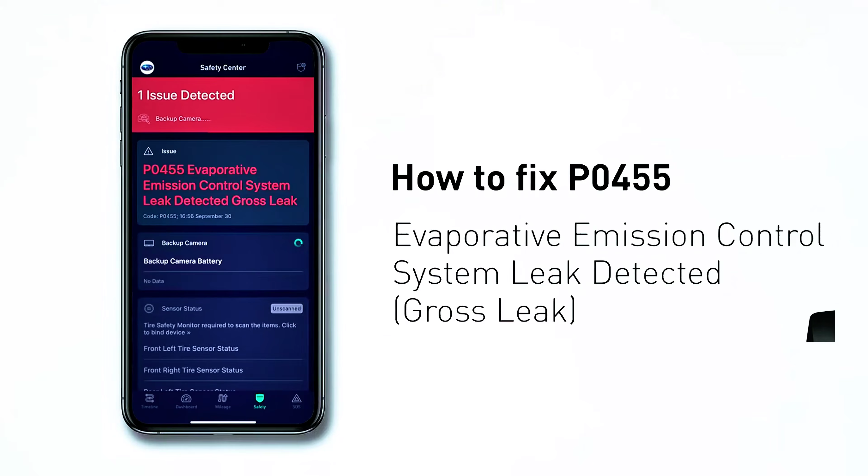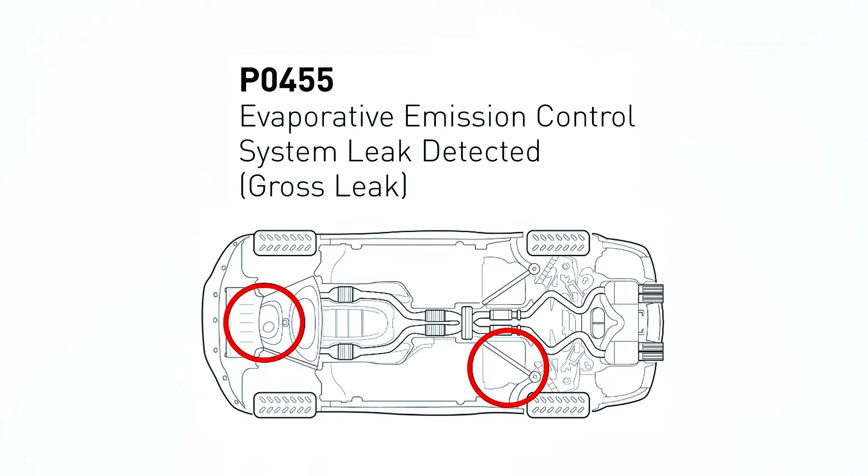Let's get started. If you are dealing with a P0455 error code, this video will show you 2 practical at-home solutions to fix it. First, use the Zeus app to scan your vehicle and confirm the P0455 code. This code indicates that the evaporative emission EVAP system has detected a gross leak, which is typically larger than 0.04 inches in diameter. Here are 2 simple, practical DIY methods you can try to resolve this issue.

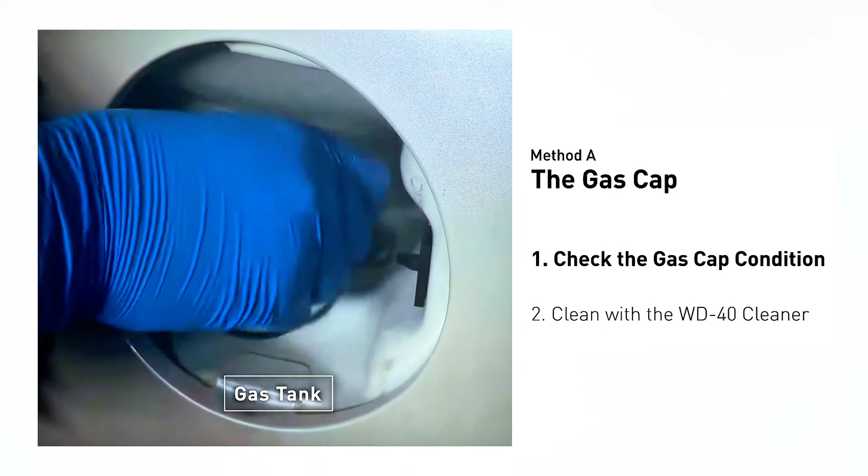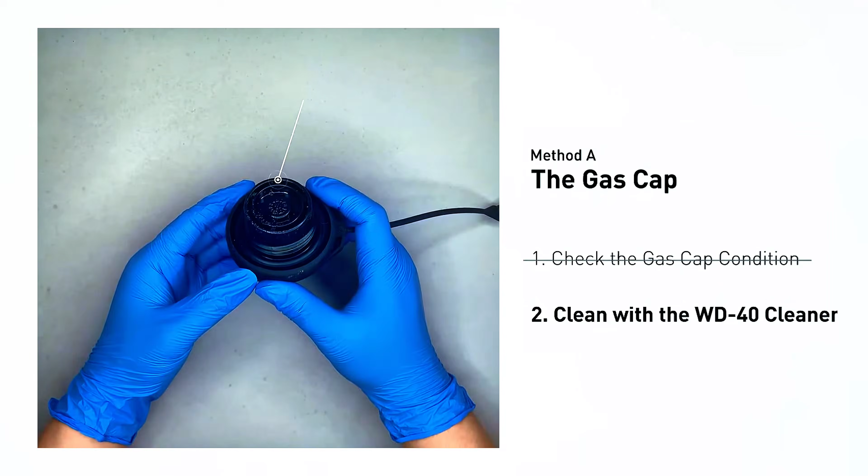Method A. The gas cap. Start by opening your fuel door and inspecting the gas cap. Check the rubber seal for cracks or debris and ensure it tightens securely. First, clean the gas tank opening using a WD-40 cleaner. Next, inspect the gas cap for any dirt or grime. If it's dirty, use the same cleaner to wipe it down.

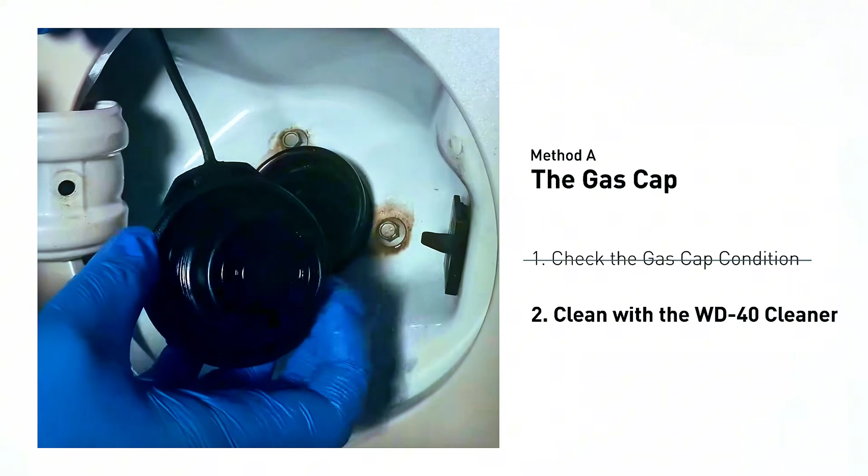If cleaning doesn't solve the issue, or if the cap appears worn out, you should replace it with a new one that matches your vehicle's specifications.

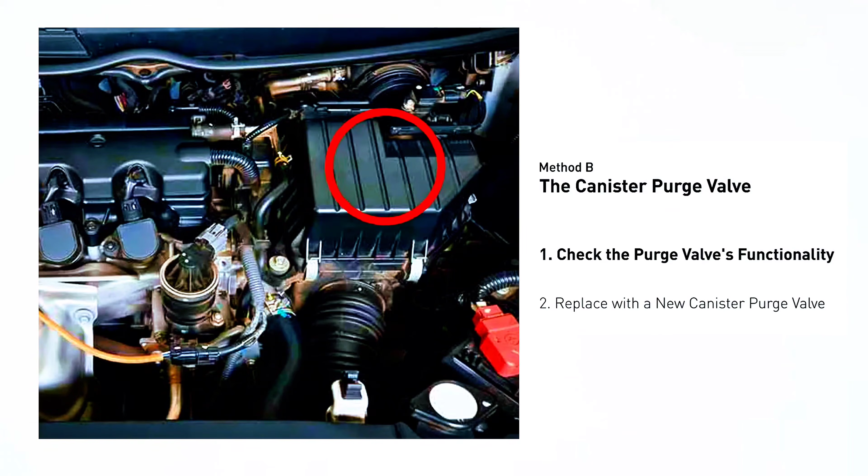Method B. The canister purge valve. The canister purge valve is typically located behind the intake manifold, right next to the throttle body. For the purpose of this demonstration, we have removed the valve ahead of filming to give you a clearer view. However, you should locate the component in your vehicle while the engine is running to test its functionality.

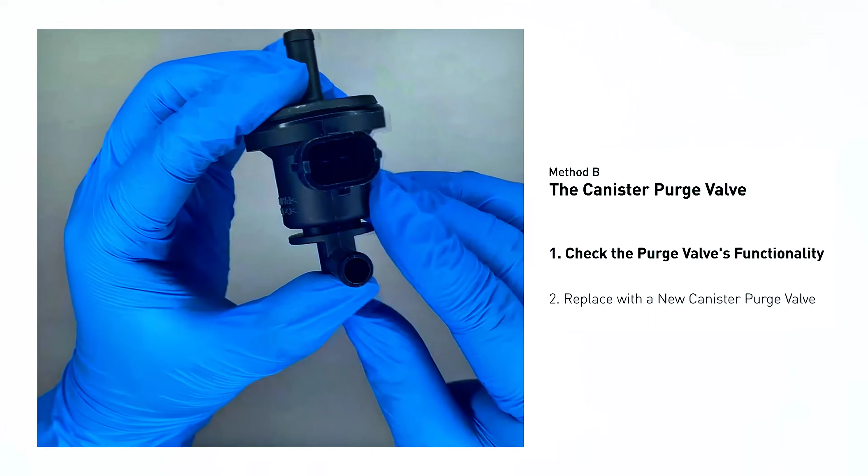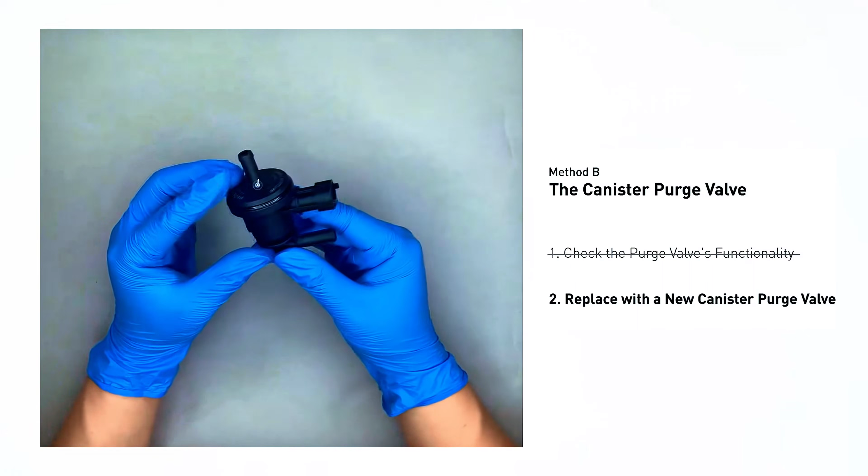Place your finger over the vacuum port. If you feel a constant vacuum suction, it indicates that the canister purge valve is stuck open and needs to be replaced. Simply disconnect the hoses and the electrical plug to remove the old valve. Then, install the new one, reconnect everything, and ensure it is firmly in place.

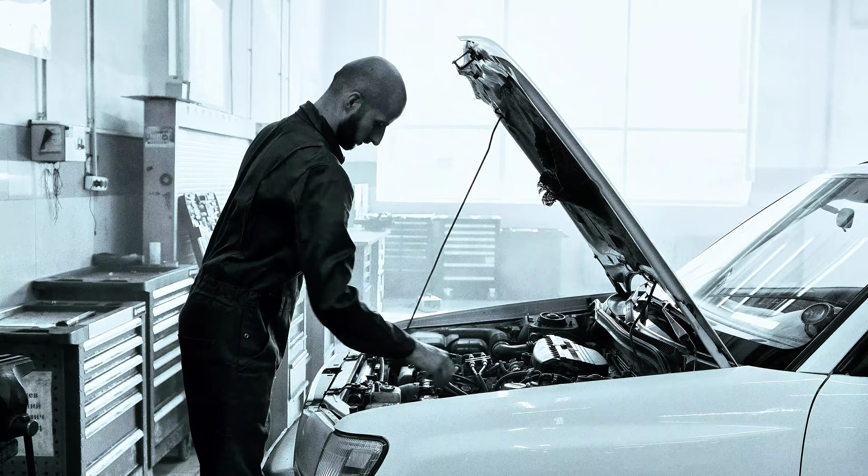After the repair, use the Zeus app to clear the error code. Then, tap the rescan button once more to ensure everything is working properly with your vehicle. And that's how to fix a P0455 error code in just minutes using 2 simple DIY methods. Always remember to start by checking your gas cap and EVAP hoses, as these are often the fastest, most affordable, and most common solutions.